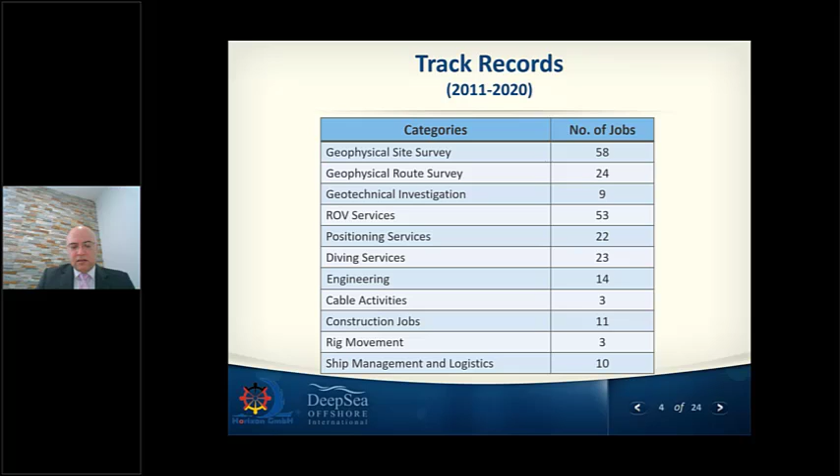In this slide, you will see the track record the company has gained during 10 years of operations, mainly indicating survey capabilities. Since I am the presenter for the second day, addressing preparatory activities and engineering for recovery of offshore wind parks, and time is short, I will hand over the presentation to my colleague, Mr. Bidabadi, the technical director of the company, who will continue with the technical part. Thank you.

Good day, ladies and gentlemen. Today we want to speak about the application of seabed survey in oil and gas, and also for pre-decommissioning of offshore wind parks. First, I want to explain briefly about the application of seabed survey in oil and gas.

For any oil and gas project, we have different stages from exploration to decommissioning of the structures. In each phase of this oil and gas development, we need a different type of seabed survey. For the explore section, we need to do seismic surveys to find the potential areas which include oil and gas.

Then for the appraisal section, we use a drilling rig to drill in the nominated area to confirm whether the field is live or not. For this purpose, we need to do geophysical survey, geotechnical survey, UXO survey, and rig positioning for the rig.

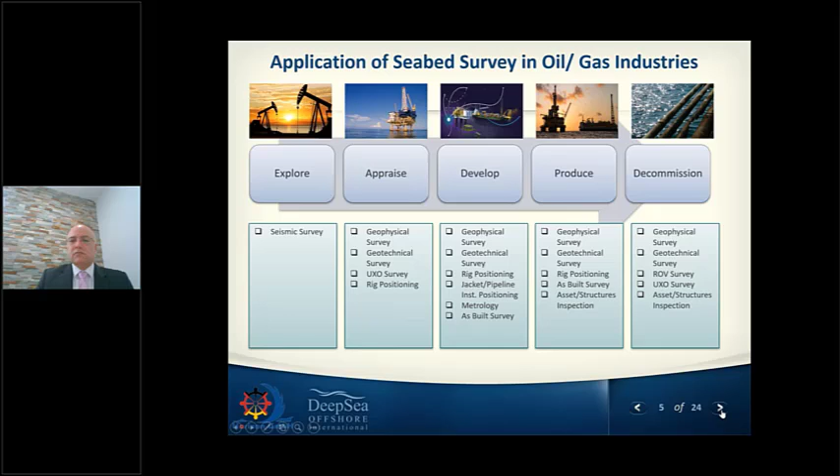By developing a field and the client reaching production, we need to do periodical inspection of our assets, such as the platform and pipeline, and also provide the required positioning service for drilling rigs or other vessels that need to work near our structures. At the end, after the structure passes its lifetime, it needs to be decommissioned.

Now we want to speak about the seabed survey application for decommissioning of offshore wind park components, which are separated into 4 types: wind turbines, submarine cables, high voltage substation, and meteorological mast.

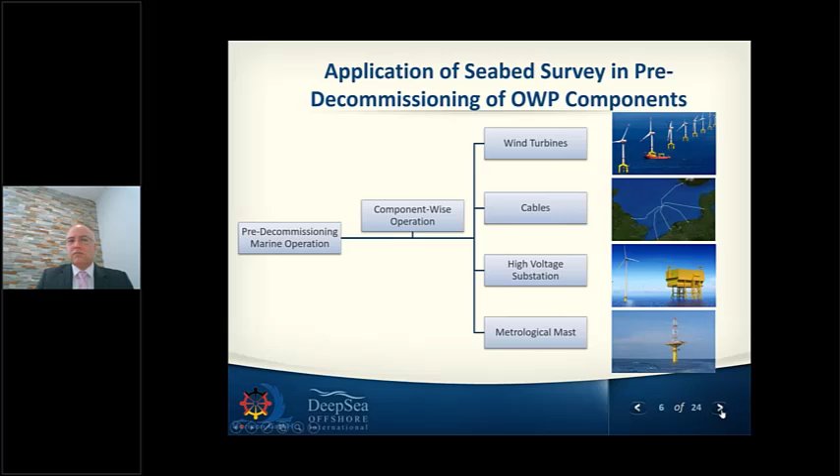For the decommissioning of these components, we need different types of seabed survey. The objective of doing the seabed survey for pre-decommissioning of offshore wind park components is identification and removal of debris which may be located near our structures or near the routes. Even one of the dangers for our decommissioning operation would be UXO, so we need to discover and report possible UXO located in our working area.

For the removal of the cable, we need to know the crossing objects that may cross our target cable. Maybe some pipeline or cable has crossed it, and we need to specify its position to recover the cable. One of the most important points for our project is the depth of the buried cable.

As you know, the cable from the structure toward the shore has been buried, and for the recovery of this cable, we need to know the position and depth of this cable. This target will be achieved through the seabed survey.

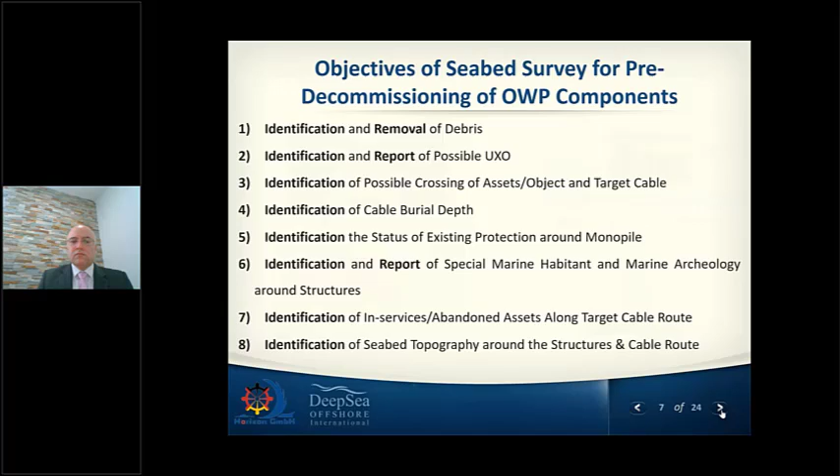Also, the status of existing protection around the monopile, any special marine habitat or marine archaeology that may exist near a structure should be detected and reported to concerned parties. In-service or abandoned assets such as cable or pipeline should be detected, as well as the topography of the seabed.

So for achieving these targets, what should we do for the seabed survey? We need 4 types of seabed survey categories for the pre-decommissioning activities.

The first is geophysical site and route survey. The next is UXO. The third is visual inspection and debris removal, and the last would be geotechnical survey. In the next slide, we explain briefly about each of these activities.

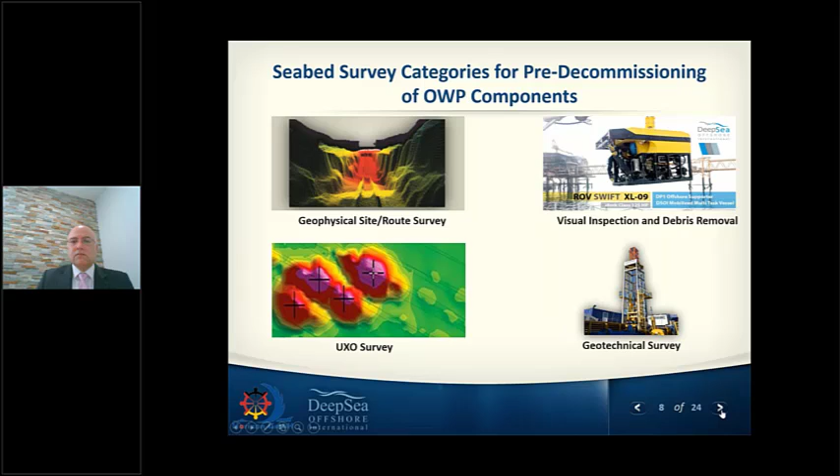For doing the survey, obviously we need a multi-purpose DP survey vessel equipped with geophysical, UXO, and ROV inspection equipment. This vessel belongs to our company and is ready to do all of the above mentioned operations. For doing the geophysical site survey, we need some equipment.

The equipment needed for the geophysical site and route survey, which means the geophysical survey around the structures and along the routes of the cable, includes surface positioning using accurate DGPS and gyro compass to provide the positioning of the survey vessel, as well as the data achieved by the survey sensors.

The bathymetry data, which means the topography of the seabed, will be provided using multi-beam and single-beam echo sounder units, and side-scan sonar equipment will be used for scanning the seabed to detect possible debris or other objects such as pipeline or crossings located on the seabed.

The magnetometer system is one of the important systems needed for the geophysical route and site survey, because it will detect ferrous objects, especially for the cable. For our purpose, where the cable is buried, this system can detect the buried cable.

Since we are using underwater sensors such as the side-scan sonar towfish and magnetometer towfish, we need underwater positioning systems to provide the position of these sensors. This is achieved using USBL or SSBL units, and at the end we need the sub-bottom profiler unit to provide the profile of the sub-seabed layers.

After doing the geophysical survey, we should submit the reports. For the reports of the geophysical site survey and route survey, we will provide two types of report.

The first one is the text report, which explains the used methodology, vessel equipment and personnel, and also the result. The result will include details of found possible objects and debris, condition of subsea layers, and detail of the detected magnetic anomalies.

Also in the chart, as you can see, one sample of the geophysical site survey charts, the data around the existing structures such as wind turbine, high voltage substation, and meteorological mast will be illustrated.

You can see the sample of multi-beam echo sounder, which shows the topography of the seabed around the existing structures such as the platform, and also the side-scan sonar data, which shows some pipeline or other object around the existing platform.

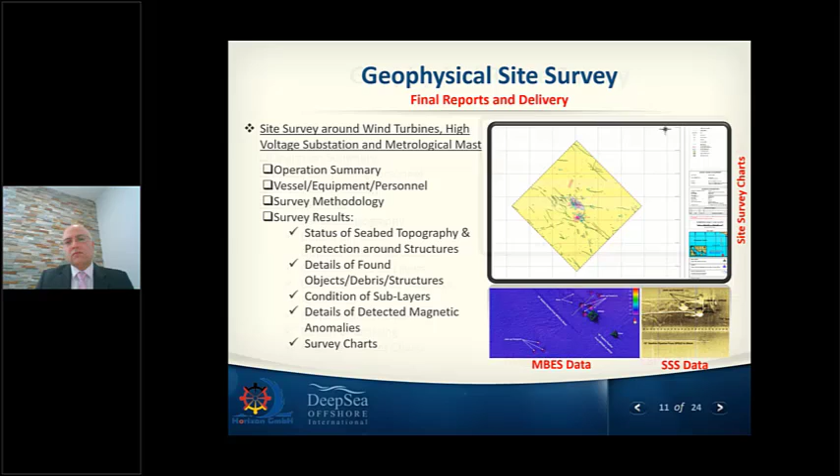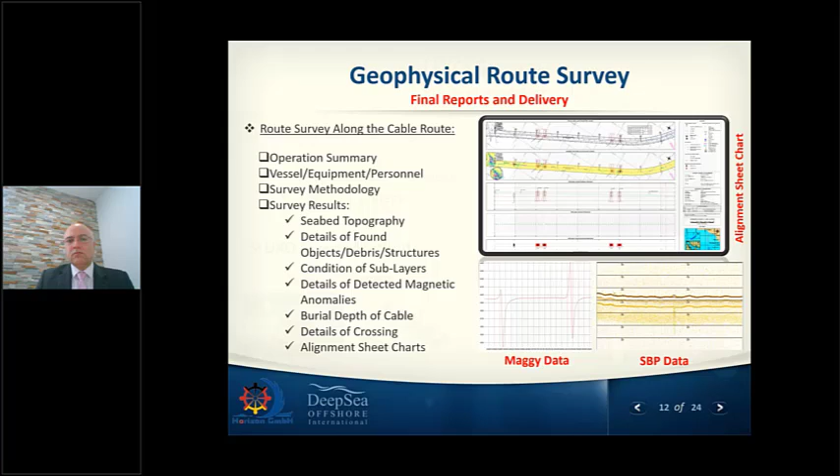By using the sub-bottom profiler and magnetometer data, you can see with sub-bottom profiler data we can detect the seabed layer and also sub-seabed layers. If there is any cable, we can define the position and extract the position from sub-bottom profiler data as well as the depths. Even magnetometer data will provide us the position of the crossing to the cable.

So at this stage, geophysical survey is already done. Now we should do the UXO survey. The UXO survey has more parameters to consider, because this survey can carry risk for our purpose. So for this planning, we need some parameters.

The type of UXO that we may find should be provided by our clients, indicating which type of UXO can be found in our area. The local marine environmental data, such as the depth of the area and seabed sediment, can be extracted from the geophysical survey, and we should plan for the UXO risk strategy, because one of the goals for the UXO survey is to minimize the positions that need to be visually inspected afterward.

In normal practice, two types of methods are used for doing the UXO survey. One is using the towed gradiometer, which includes an array of the magnetometer system towed behind our vessel. Another is using the ROV mounted bracket for surveying the gradiometer along the field.

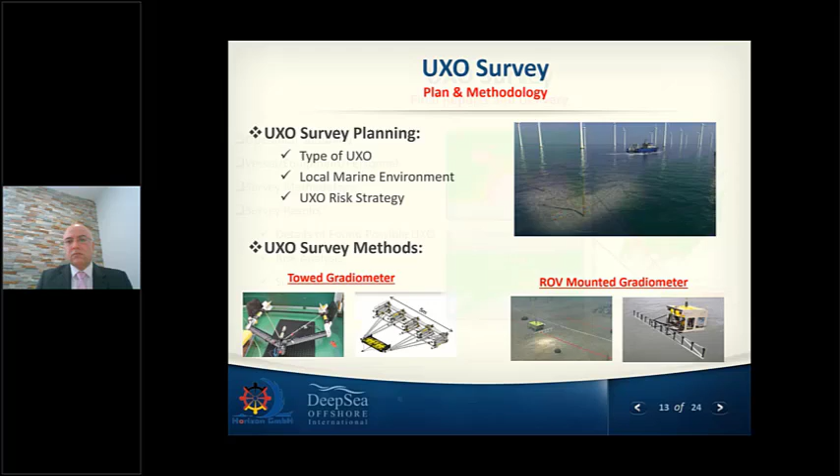So with this equipment we will do the survey, and after the completion of the fieldwork activities we should provide the reports. The report of the UXO survey will include some text reports and also some charts. You can see on the right side a sample of the chart for the UXO survey.

In the UXO survey, the gradiometer, which is our array of magnetometers, will specify the area that would possibly include a foreign object. We are not sure these are UXO or not because we need to do the visual inspection.

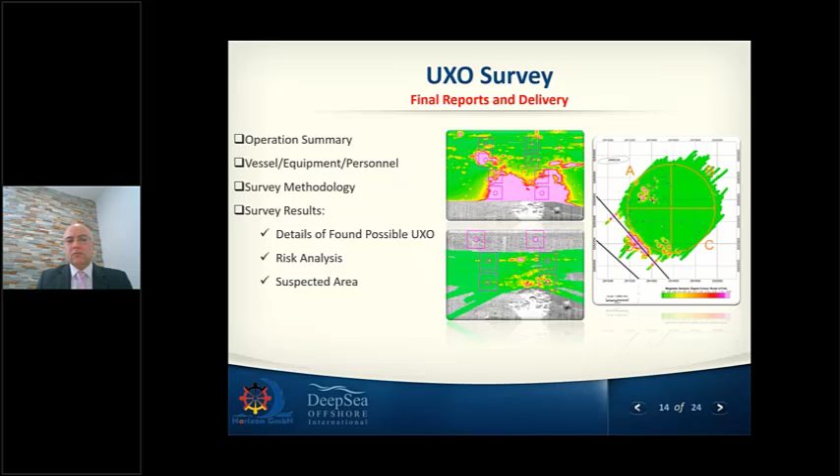So after doing the geophysical survey and UXO survey, we need to do the visual survey to check the reported debris and possible UXO, to make sure whether these need to be removed or recovered or not. Another part of the UXO survey report will include details of found possible UXO, risk analysis for doing the visual inspection, and also the suspected area.

As I told you, the visual survey after doing the geophysical route survey and UXO survey would be required, because we need to check visually whether these reported debris or UXO are actually there or not. Maybe some other object would be there. Even we should do the visual survey around the structures.

We have some structures such as the wind turbines and meteorological mast, and most of the time there are some assets around these structures. So we should do the visual survey to check the condition of this asset which needs to be decommissioned, and also the protection around this area.

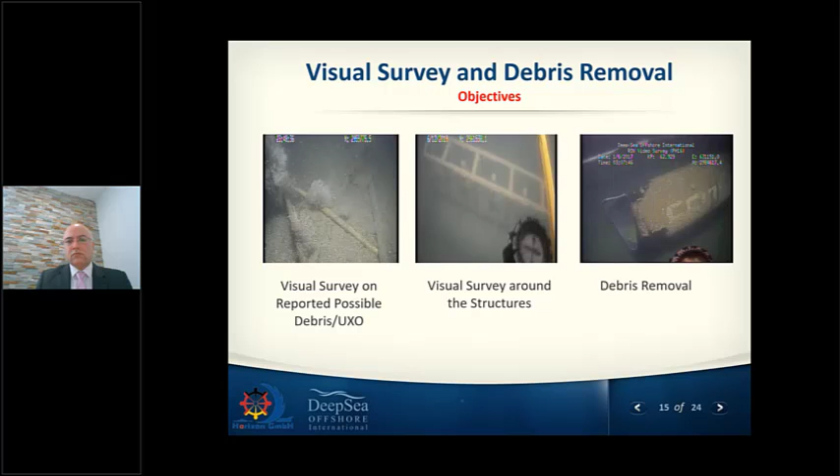And at the end, if we found some debris specified by the client that need to be recovered, we should do the debris removal. For doing this task of visual survey and debris removal, we offer to use a work-class ROV.

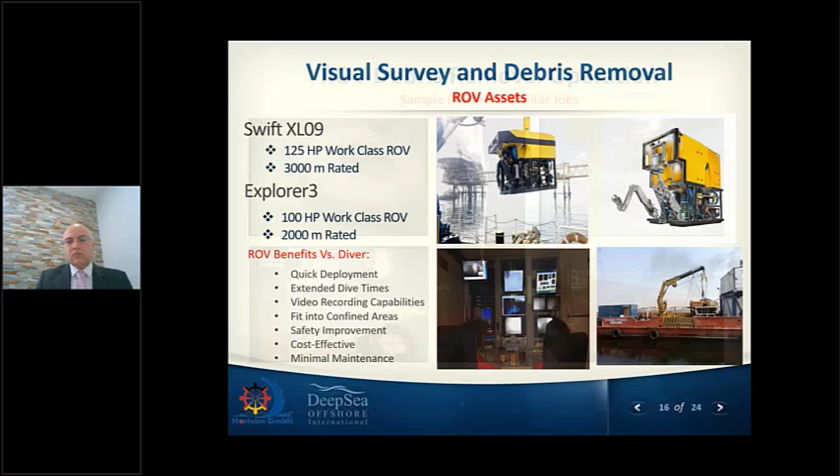The question may be raised, can we use a diver? We say yes, we can use a diver, but why do we recommend ROV? Because the ROV has some advantages versus diver: very quick deployment, extended dive times compared to diver, and most important, safety improvement, especially for visual inspection of UXO. If we use ROV, it's much safer than diver.

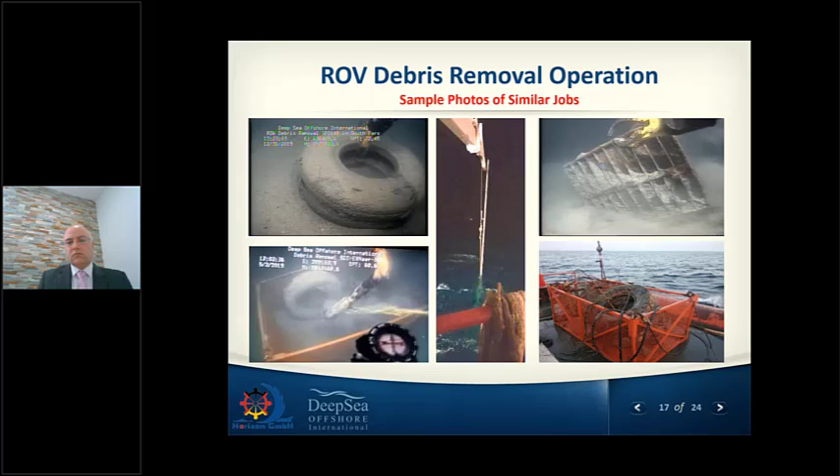You can see some sample of the recovered debris by a ROV. The ROV recovers the debris from the seabed and locates it on a basket, and if the debris is heavy, by using the vessel crane, we will recover it to the surface.

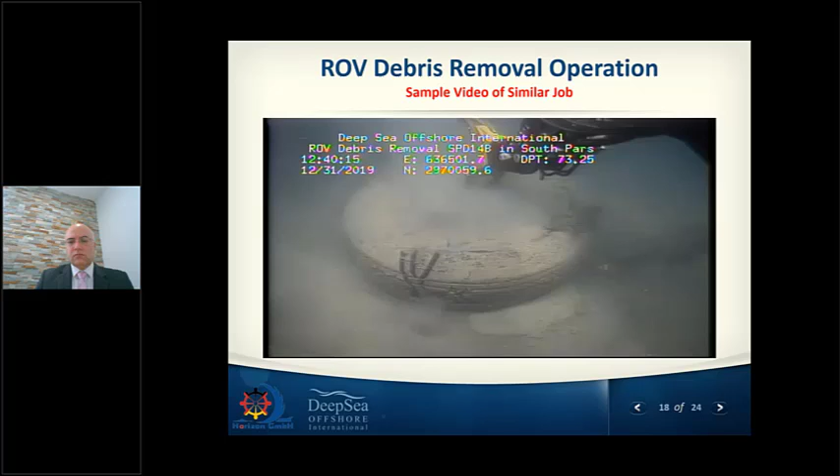There is also a sample video of similar jobs illustrated here, but due to short time and since we are near our time limitation, I think we can pass this slide.

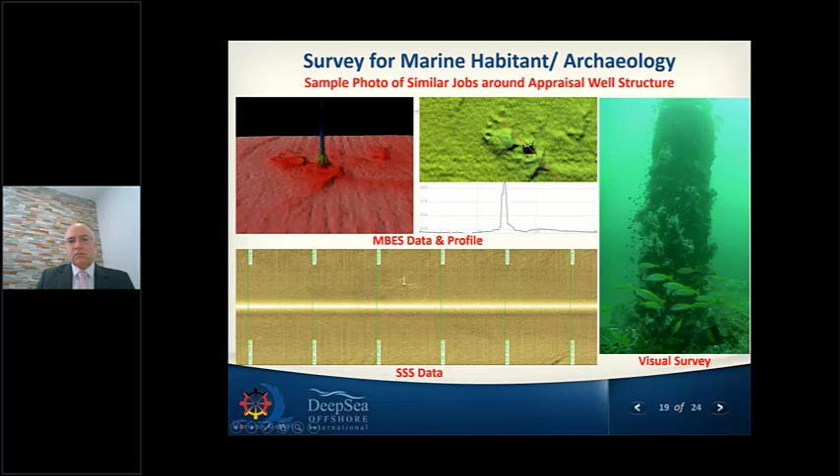Another target from the seabed survey would be the survey of marine habitat or archaeology around our structure. In this slide, you can see an appraisal well installed on the seabed that has been detected by geophysical survey equipment with multi-beam and side scan sonar data. We also did a visual survey around this structure to find whether there is any marine habitat or archaeology around it.

You can see the video of this inspection. Some protection around this structure is visible, and some habitat is there.

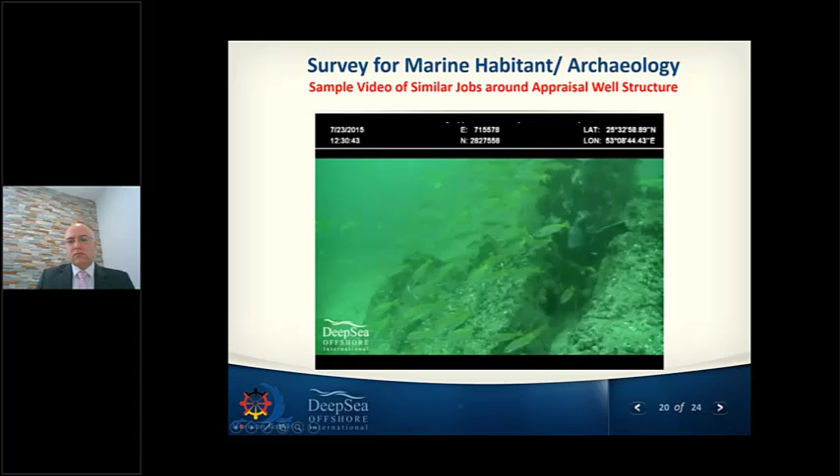By combination of the geophysical survey, UXO, and visual inspection, we need to do the geotechnical survey. Why do we need this? Because we need to know the soil parameters, since our cable is buried. When the cable is buried, we need to know the type of seabed sediment because we shall do engineering analysis for safe recovery of this cable.

For this purpose, we should use some methods for collecting samples from the seabed and extracting the soil parameters. One method is using wireline and rotary drilling units, which can collect samples up to 150 meters below seabed. Another is using cone penetration test (CPT) tools, which provide soil parameters online along the drill area. And another is drop and vibrocoring, which drops the core to the seabed using a free fall winch and collects the sample.

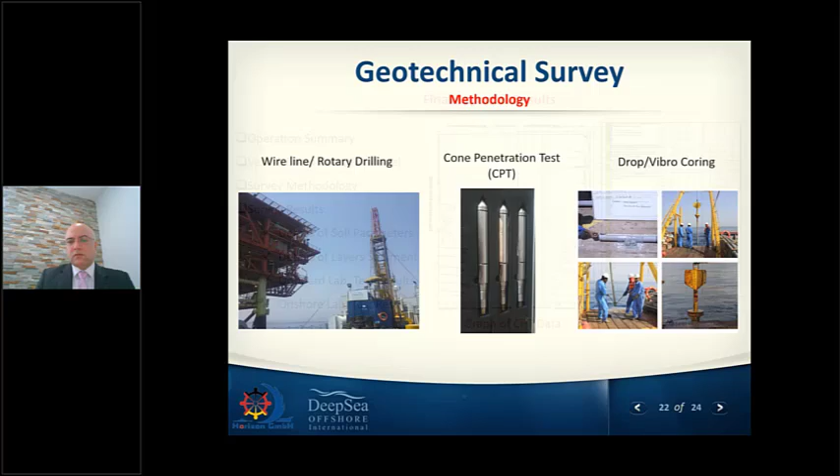After collecting the sample, we should do the analysis and submit the report. We have some analyses and tests on board the vessel in an onboard laboratory, and some tests should be done in an onshore laboratory.

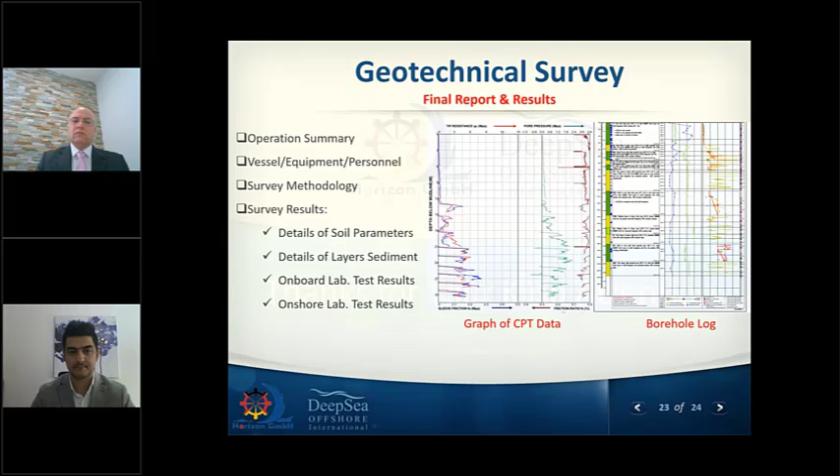For the geotechnical report, we will provide the details of soil parameters, details of layer parameters, and the results of onboard and onshore laboratory tests, as well as the graph of the CPT data. These data can be achieved online through the project, and the borehole log will illustrate the seabed sediment. That was a fast and rapid review of the seabed survey application for pre-decommissioning of the offshore wind farm. Thanks for your consideration.

Thanks for your consideration.

Thank you very much, Captain Ilyati, and thank you very much, Mr. Bidawadi, for the informative presentation. We can see that what you propose with the subsea operation is totally similar between the oil and gas and the offshore wind industry, so in this case we can use the same equipment and tools as you proposed.

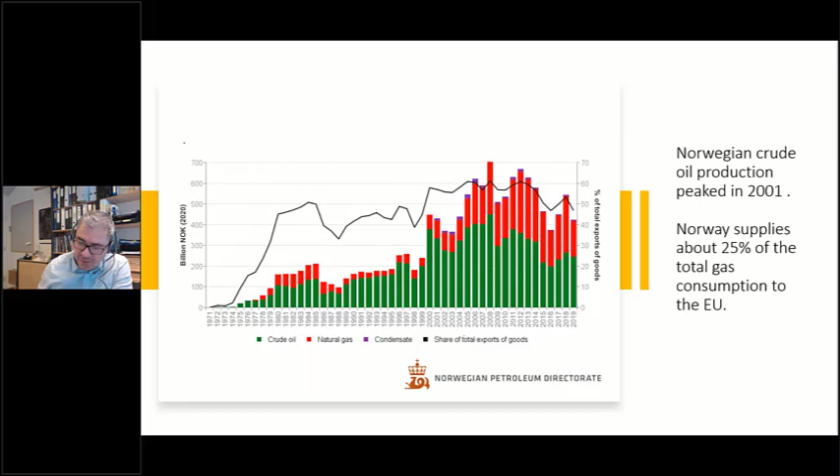Everything else includes a lot of technology development, but this has also been related to oil and gas. In recent years there has been a lot of talk about diversifying this industry, and that's coming from an early stage. Since 2001, the peak in oil production happened in Norway, meaning they are already diversifying into other services. But today it's roughly 50% oil and 50% gas. Just to give you an idea, around 25% of the total gas consumption from the EU came from Norway - it's a very big industry.

I borrowed this slide from one of our partners in this project, from the Hamburg Institute of International Economics. Here you can see clearly that Norway has no offshore wind parks. Most of the development and installation of wind parks has happened in the last 5 years - you can extend it to the last 10 years maybe. But this is quite recent, and Norway has not been a part of it.

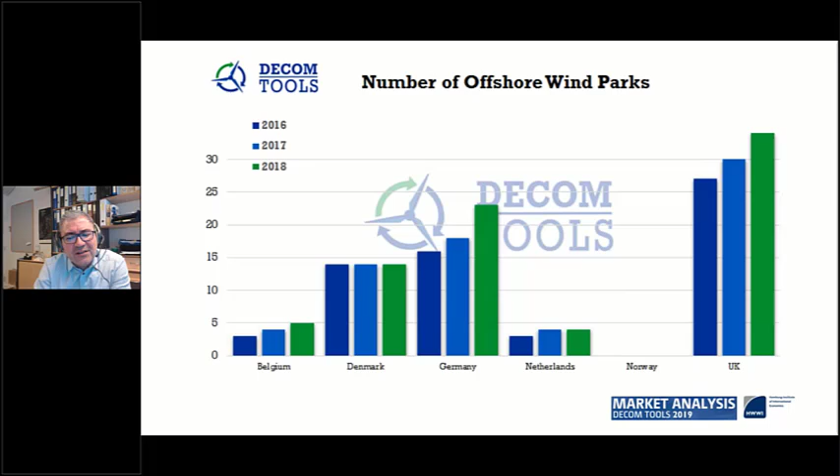You may think that's obvious, since Norway was so focused on oil and gas, but it's a little more complicated than that. In the years from 2000 to 2010, there was strong interest in wind power in Norway. However, this didn't develop well. There are three main points why this didn't happen in Norway while it happened in the rest of the North Sea region.

One of the issues is that there was strong growth in revenues because the oil price was very high. In the first 5 years of this decade we were talking about $100 per barrel, and that disincentivized the offshore wind movement in Norway.

There were, however, some research projects related to floating offshore wind - a pilot project that was very well known. But also at the same time, in 2010, the Johan Sverdrup oil field was discovered, one of the largest in the North Sea. So the expectations in the political agenda changed dramatically.

A third factor was that Norway has a lack of domestic demand for electrical power because it rains quite a lot, so hydropower provides 96% of domestic electric consumption. So somehow the political and social forces didn't manage to push offshore wind power as a high priority in the first 5 years from 2000 to 2010, and then from 2010 to 2020 it was even more difficult.

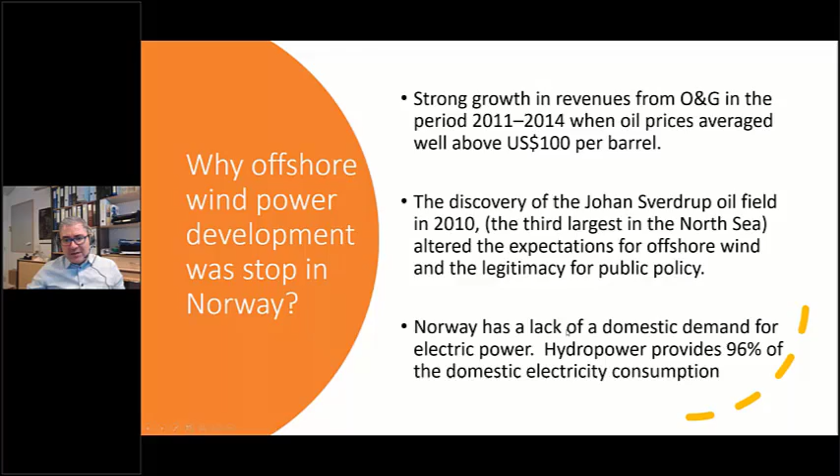However, this has changed. We have a drop in the oil price, and some things have happened in the political agenda as well. So Norway has brought oil and gas diversification strategies back into the public agenda. This company, Equinor, was called Statoil before 2018 and has been a major oil company in Norway owned by the state. The decision to change the name came as a reaction to this - we need to diversify and move away from oil and gas.

So this is high today in the agenda of the companies. If you think about the Norwegian offshore industry, maritime industry is mainly related to oil and gas, but today that is changing. So this is a recent study about what Norwegian companies do related to offshore wind.

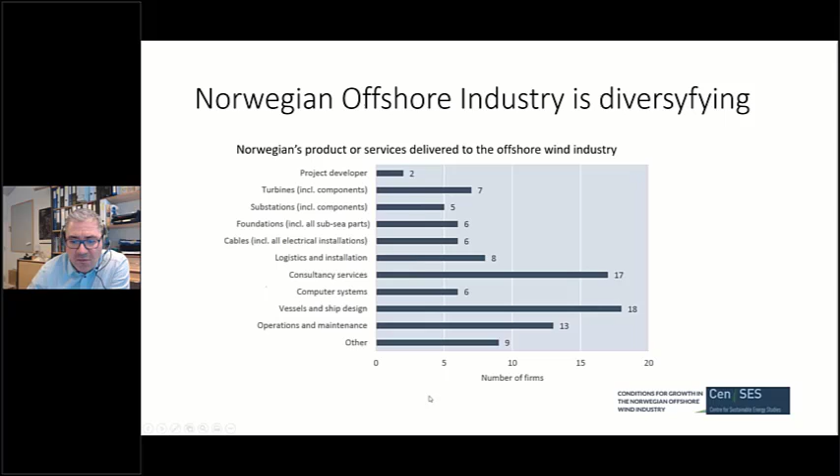Some companies, very few of them, don't deliver turbines, but they deliver components to the turbines and to electrical substations. But the major area where they can play a role today is in consultancy services, engineering services, vessel and ship design for offshore wind installation, maintenance, and operation. So this is the major area where these Norwegian companies are playing a role today in offshore wind, coming from the maritime industry in Norway.

There are some exceptional examples of this. Fred Olsen, for example, is a Norwegian company that has a long career in maritime shipping, and they have a special division that is relatively old. They started since 2012 with the first jackup vessel. It's not the only one, they have several. But this is an exception. There are not many Norwegian companies doing that today, but it's changing.

Recent news, for example August 2020, shows new developments for ships exclusively developed for installation. So the maritime industry is changing, and the oil and gas industry is also changing and moving to renewables, and offshore wind is something interesting for them.

That brings me to the second part, talking a little about decommissioning operations and the major trends we see. First, decommissioning of oil and gas is a big industry and is going to increase a lot in the next years. The three major players around the world are UK, USA, and Norway. So this is a reality today, it's not the future, and the market is going to grow.

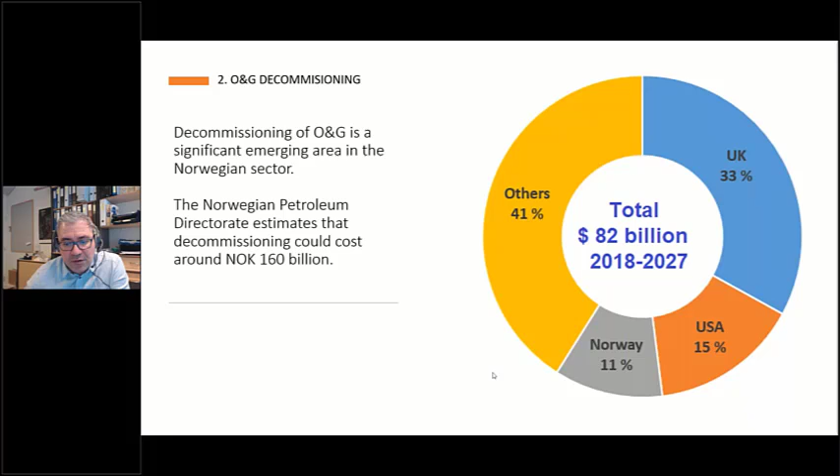Second, we have many different segments in decommissioning for oil and gas, but they are mainly two large groups. One group is decommissioning primarily related to the plugging and abandonment of oil wells. This is one big segment, and these are very specialized activities. They need to secure the oil well, so these operations are one segment.

The other segment, the one that is interesting for this DECON2 project, is the companies related to removal of the infrastructure, the large structures, the large metal jackets that are there. So these companies specialize in this segment.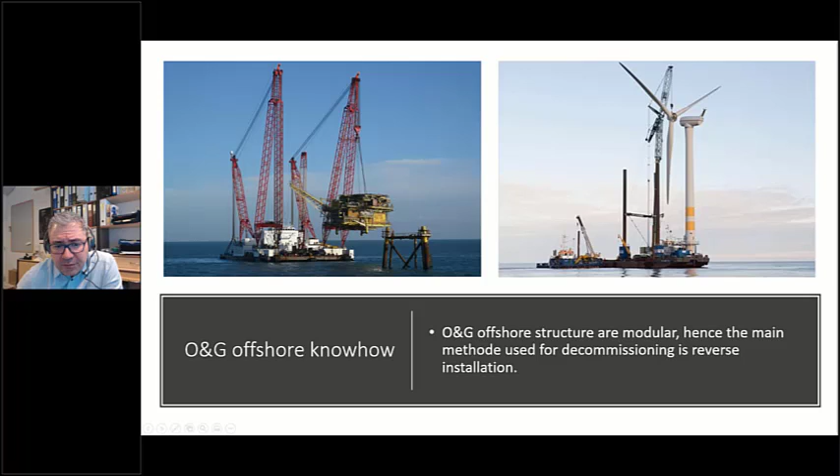If you have modular installations, you can remove it by reverse installation. To make it clear, here you see a large modular structure. This was built up as a module and it was installed as a module, which means you can take this module back when doing the reverse installation. That is a big difference from offshore wind.

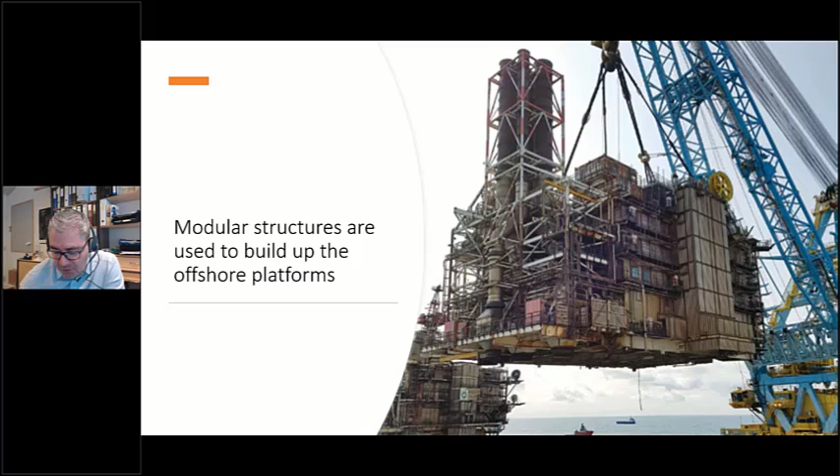There are several trends. The modules themselves are quite heavy, around 1,000 tons for a module. If you see this large oil platform, you can think mainly about two large modules at the top - these are the living quarters modules, where the people live and have offices, and then you have the process area. You separate the two modules and lift them in two operations.

But in recent years, we see another tendency - there have been specialized vessels that can do a single lift. That is a recent tendency just because the market is developing so much, and it makes it so much cheaper.

So this is a trend that we see, but we also see all kinds of things. We have interviewed companies doing decommissioning offshore in Norway for oil and gas, and they also mentioned that they sometimes use piece small demolition - meaning they bring equipment and people to the oil platform and just demolish part of the platform there. This seems like not a very efficient way to do it, so we asked, why do they do that?

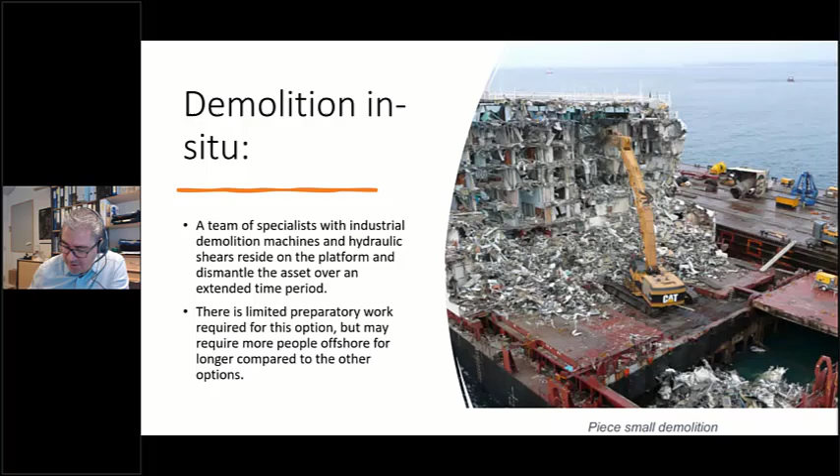So there is a difference between oil and gas decommissioning and offshore wind decommissioning, but there are some things that can be used. We have identified some technologies that can be used, mainly cutting and cleaning technologies.

Abrasive water jet technologies and high pressure pumping have been used extensively in oil and gas infrastructure. When I say abrasive water jet technology, it's mainly water with sand that is projected at high pressure, very, very high pressure - 1,000 bars. So this is something that can be used.

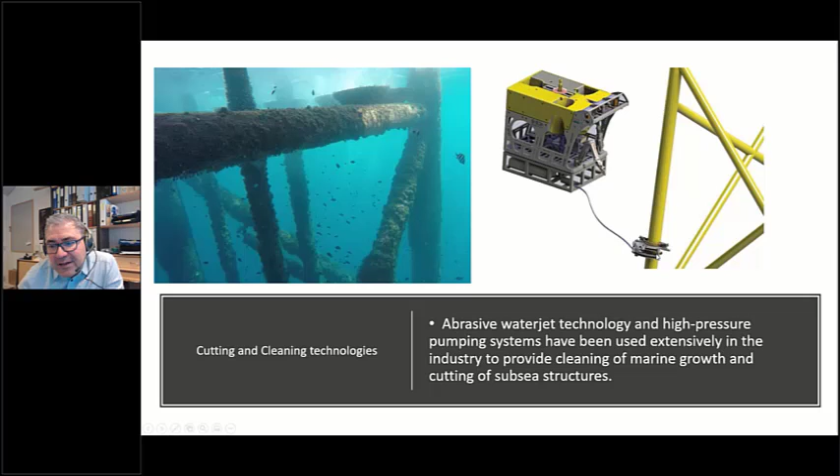Another tendency we see is that they try to automate this process. At least in oil and gas in Norway, you will try to avoid an ROV complex operation to do the water jetting. What you try to use is automation. So you use a clamp - the ROV can stay there and bring the power supply or hydraulic power unit to the clamp, but the clamp needs to work automatically.

Beside abrasive water jet cutting, another technology very much in use is wire diamond cutting. Here you can see the same approach - you have a clamp that goes there, and this wire is covered in diamond, very small particles of diamond, and that produces the cut, which can cut almost everything. It's a slower process, but it's usually done.

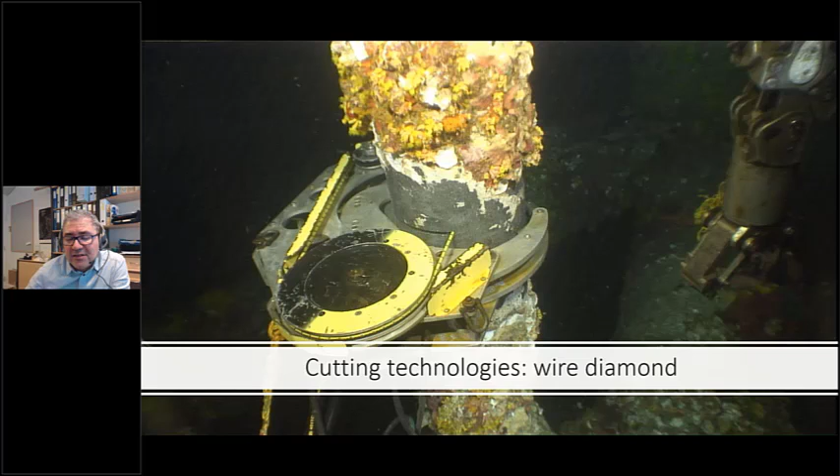What we know is that the diameter of a jacket can be 1 meter, 2 meters, but a monopile for offshore wind can be 4 meters. So those tools need to be developed as well, but they have the expertise. From a technical point of view, these companies don't see technical challenges to move into offshore wind decommissioning.

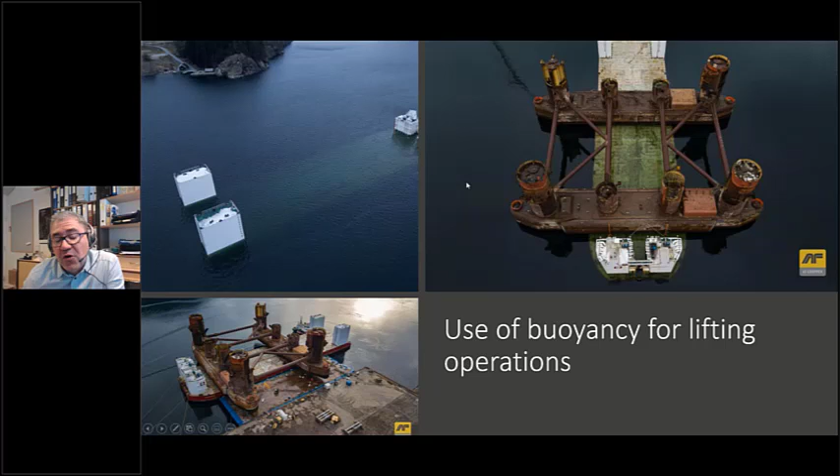Other interesting technologies include the use of buoyancy for lifting operations. This vessel can go under the water line, just to lift some structures. We have some early prototypes to think about how to use this for removing, for example, monopiles. So there is some know-how that can be useful.

Regarding Norwegian infrastructure for decommissioning, there are mainly 3 ports that are specialized in Norway for this. However, they are not the only ones in Europe - the UK is also preparing for decommissioning of the oil and gas industry, and they have several ports. But there are some advantages for the Norwegian ones.

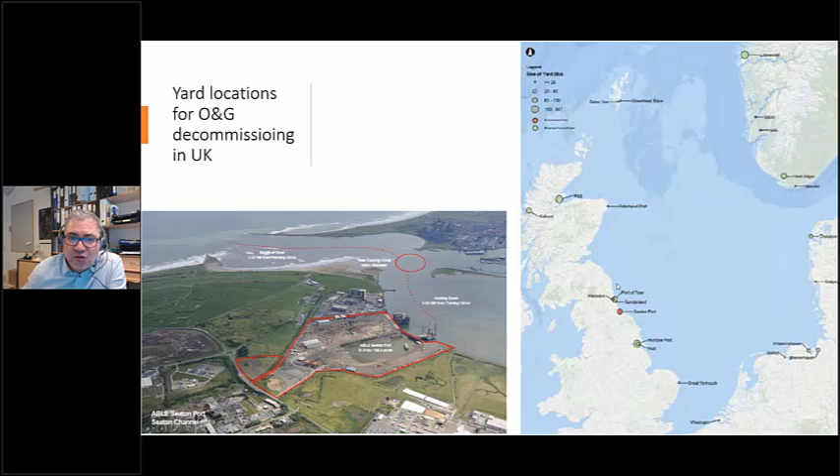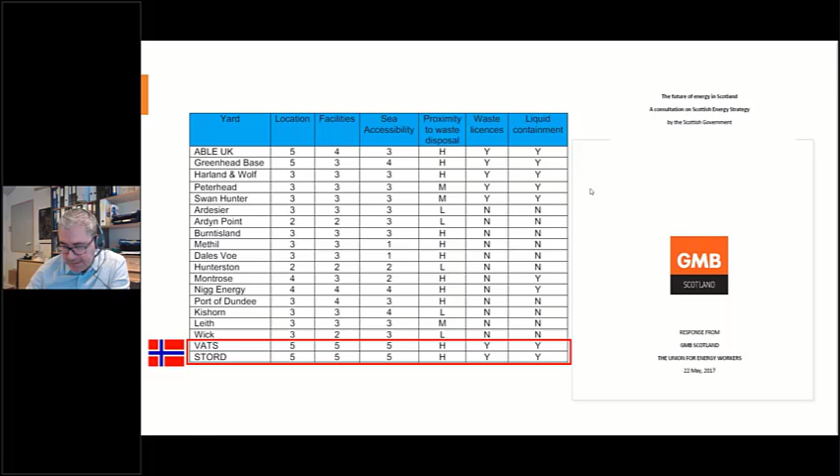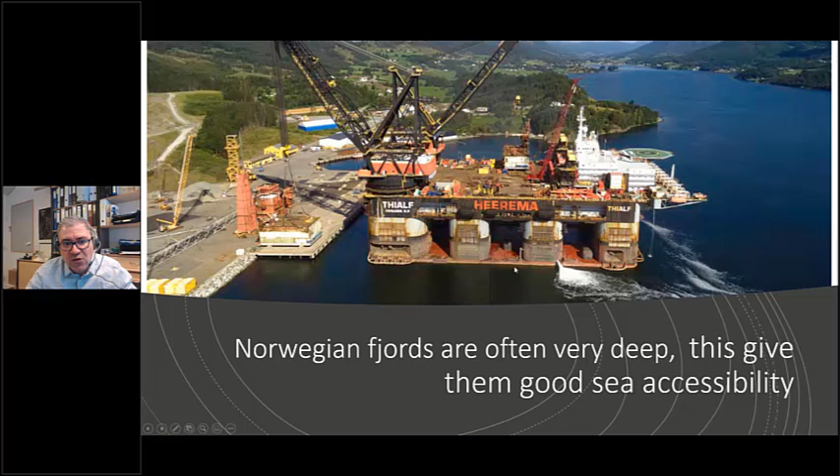So I just wanted to point out what this means in practice. First, accessibility - Norwegian fjords are often very deep, so this gives them good sea accessibility for operation, especially with heavy lifting. This is a picture of Vats, and you can see this very large crane, heavy lifting, with no problem operating close to the yards or to the quay.

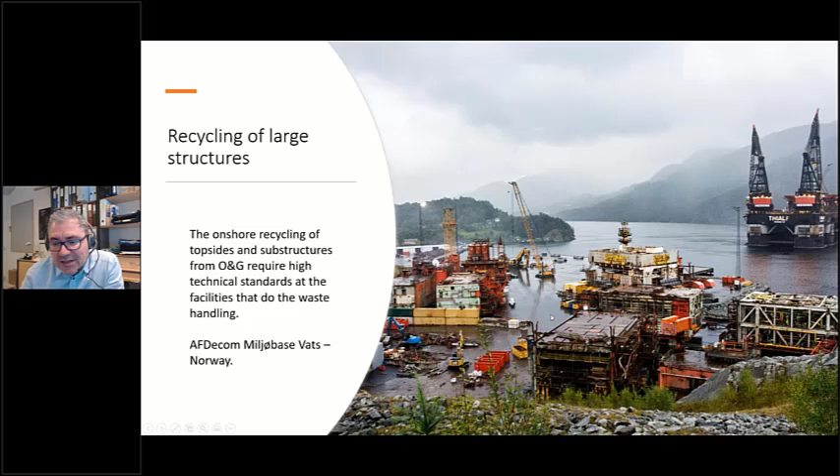So sea accessibility is one point, but the other is infrastructure. Norwegian ports have very good infrastructure. The onshore recycling of topside structures requires high technical standards to facilitate waste handling, and this is very important. These are not normal ports - they are specially built up to do these operations.

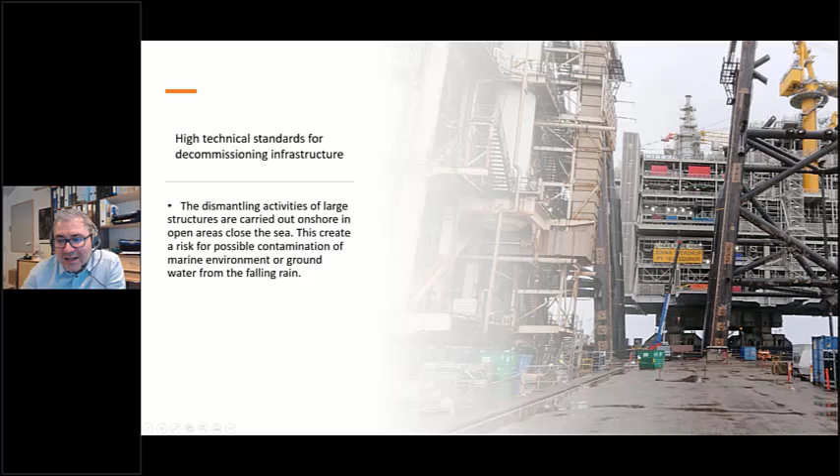What does this high technical standard mean in practice? If you have dismantling activities onshore, the structures there may create some hazard for the environment. Rainwater percolates through these structures, and it may carry heavy metals, residuals of mercury and so on with the rainwater.

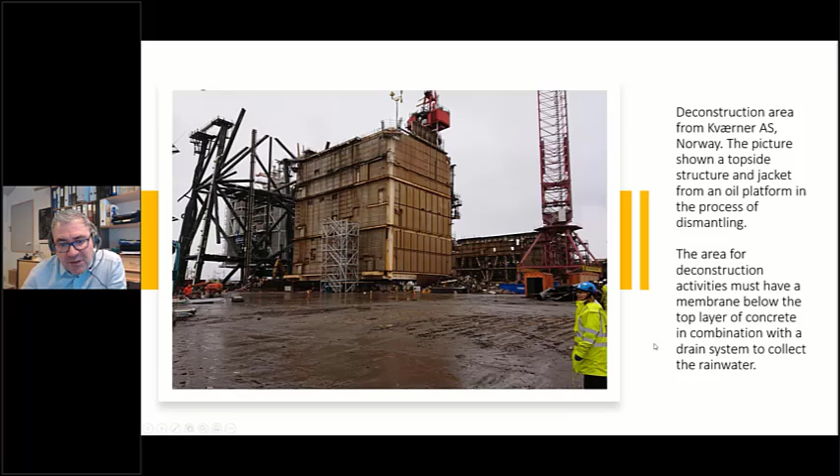So what this Norwegian port has done is place a membrane under the decommissioning area, so they can collect all the rainwater and avoid contamination of the surroundings. This is very expensive if you're refurbishing a port for that, so it needs to be done almost from the beginning.

Sometimes companies like AF Decom in Norway use natural advantages as well. In this case, close to the yard was a large cave they can use to accumulate large volumes of water, then send it to the processing plant to filter it. This is a big advantage if you need large water containment, since the cost is really high.

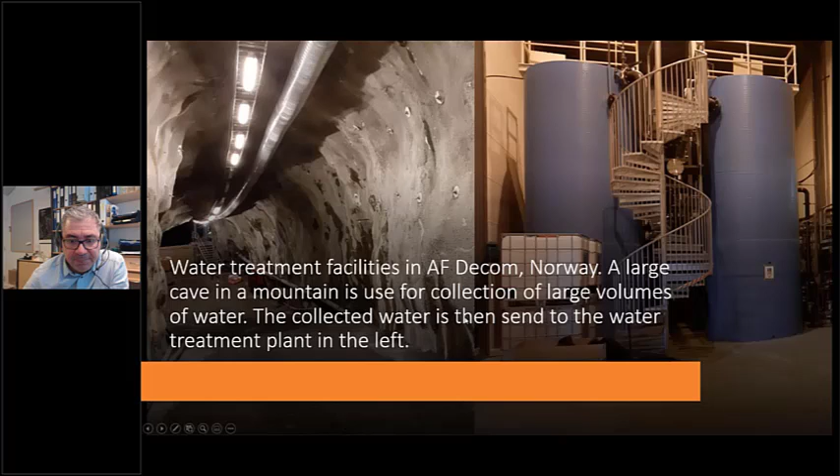In short, from visiting these companies, we've seen they don't see a big technical challenge. They are well prepared to receive decommissioning of offshore wind at large scale. They have the capabilities and infrastructure. This hydraulic guillotine, for example, is used to cut metals of 50 millimeters thickness into small pieces, and they also have hydraulic components to automate as much of the process as possible.

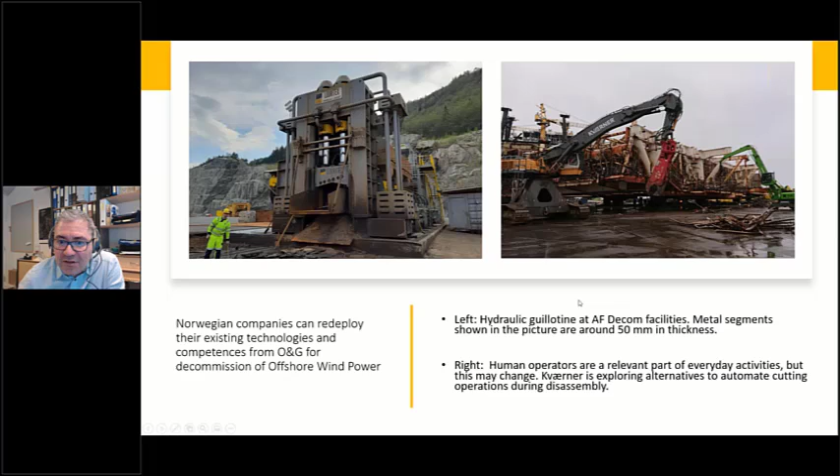So the companies themselves don't see a large technical challenge moving from oil and gas decommissioning to offshore wind. But one thing they require is high volumes, large volumes. They are not interested in decommissioning 10 or 50 turbines; they need the bulk of the decommissioning because they have large investment in infrastructure.

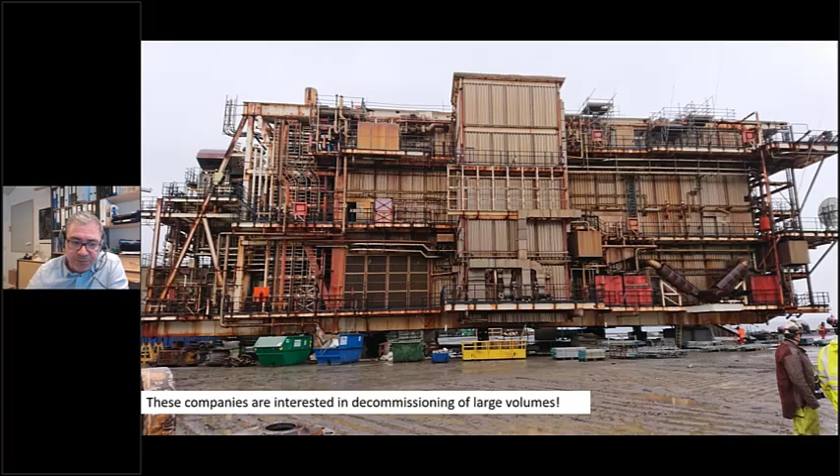In short, to get some conclusions from my presentation: Norwegian companies are diversifying, they want to enter the offshore wind industry in Europe, and all kinds of maritime operations are of interest to these companies. But specifically regarding decommissioning of offshore wind parks, these Norwegian ports need large volumes, so they won't be interested in small wind parks being decommissioned. They will wait for the large ones.

So this was my presentation. Thank you for your attention.

Thank you very much, Andres, for the presentation. It was a mixture of technical and field experience and reports, and we understood that one reason Norway does not develop offshore wind energy so much is that the price of oil and gas doesn't incentivize the country to develop wind farms. The second reason was that there isn't so much demand—they use hydropower, so nationally they don't need wind energy. And we saw that they are really advancing oil and gas, which can use all of the infrastructure in the offshore wind industry as well.